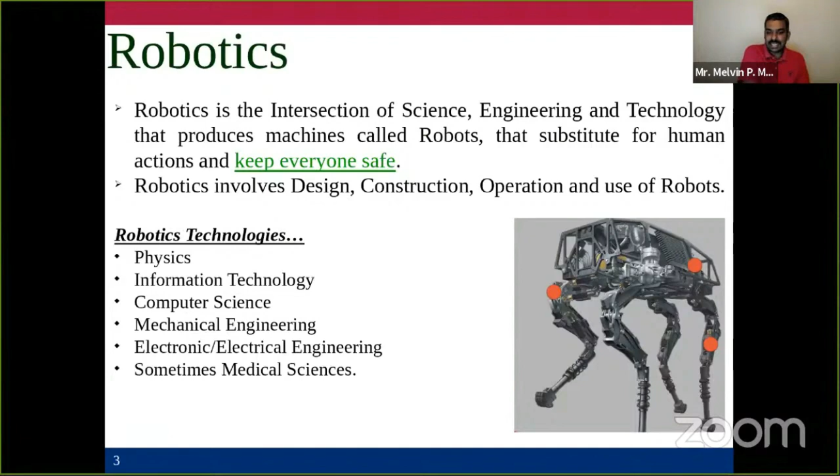Some of the technologies used for developing robots are physics, basically, because that's the main branch in robotics. Then IT, like for programming, computer science, mechanical engineering, electronics, electrical. Medical sciences are also involved in developing robots.

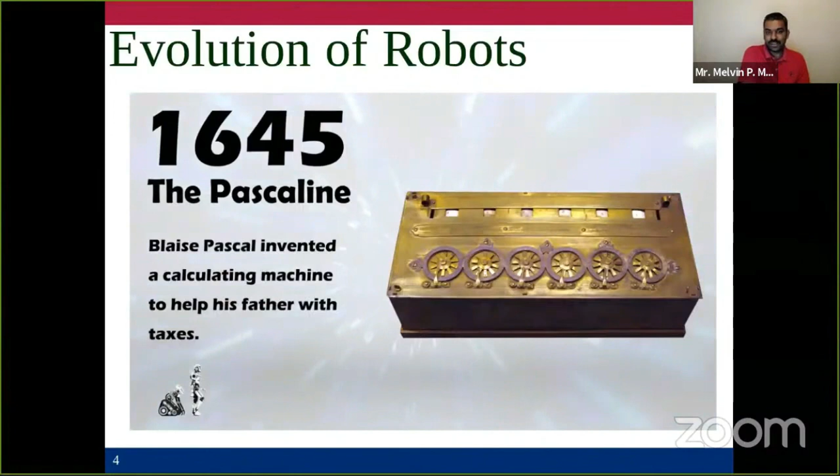This is a small video which shows the evolution of robots. As I told you, the name robot started only this century, but some automated mechanical things were there in the earlier 17th century.

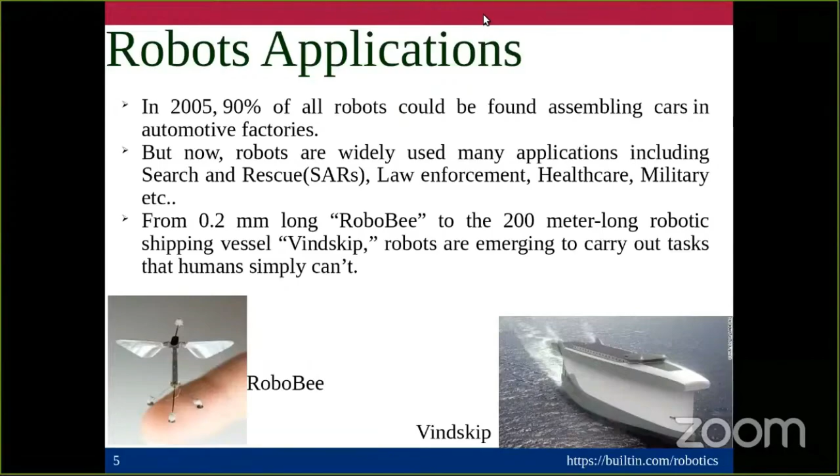I believe the video was clear. Just to save the bandwidth, I stopped my camera. It's basically the small robot of 0.2 millimeter long, called RoboBee, and the big one of 200 meters long, it's Vindskip.

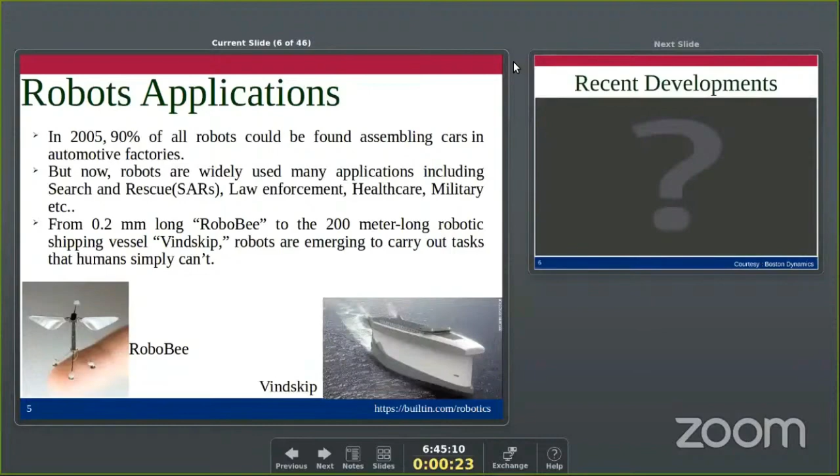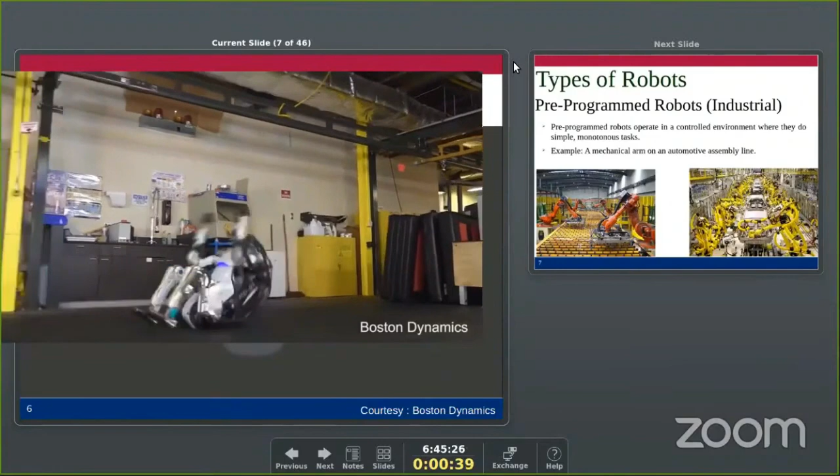The next video is going to show the recent developments of robotics. This video I took from Boston Dynamics, a company here in the US. They are manufacturing different types of robots, basically legged robots or humanoids. This is one of its kind.

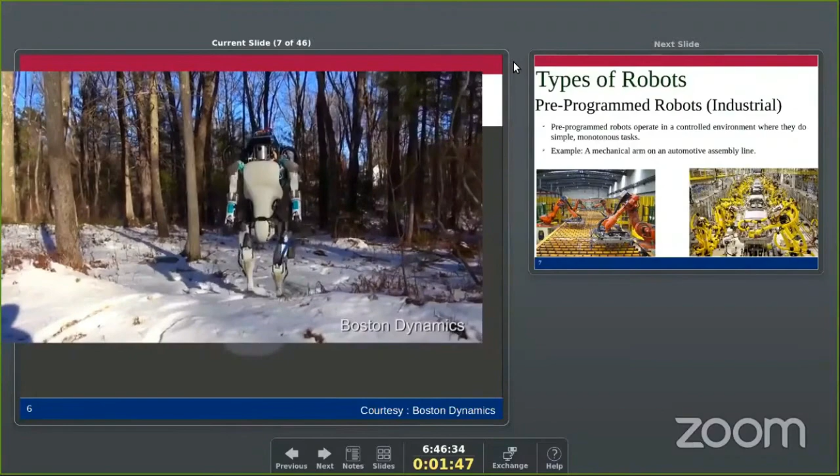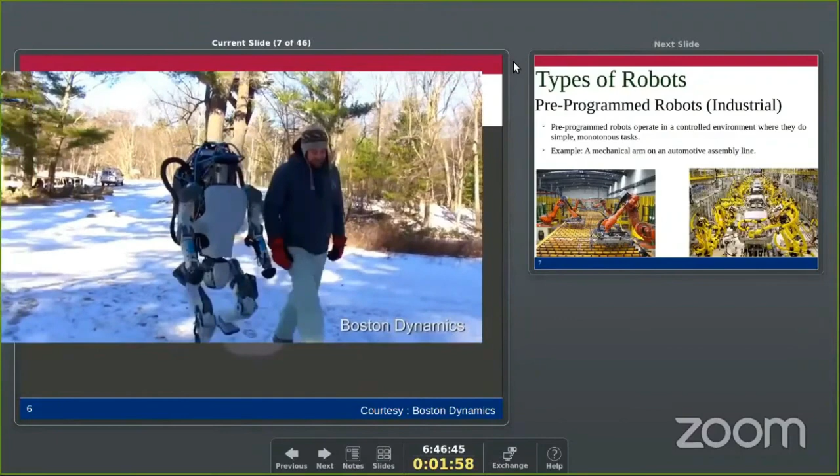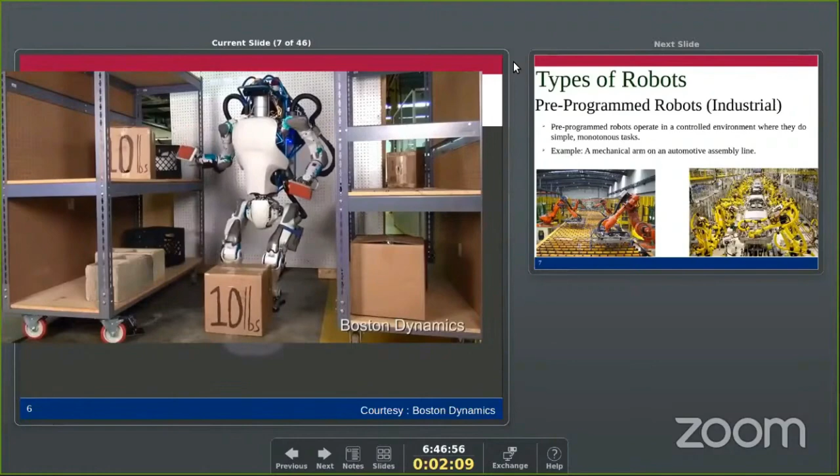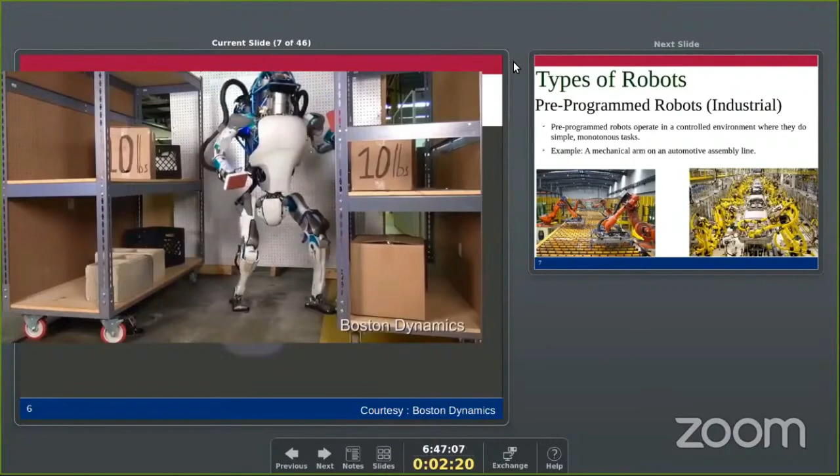You can imagine how complicated the dynamics will be, because it needs to stand on two legs like a human and control its movements. A lot of physics is involved here. This kind of robot is commercially available nowadays in the US.

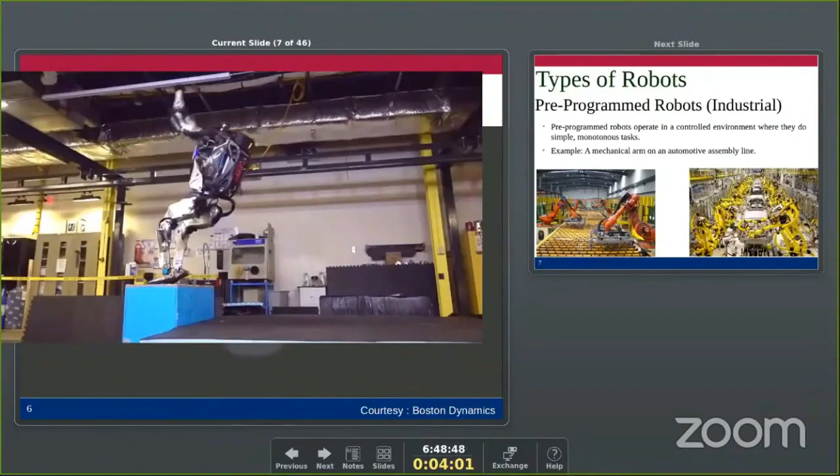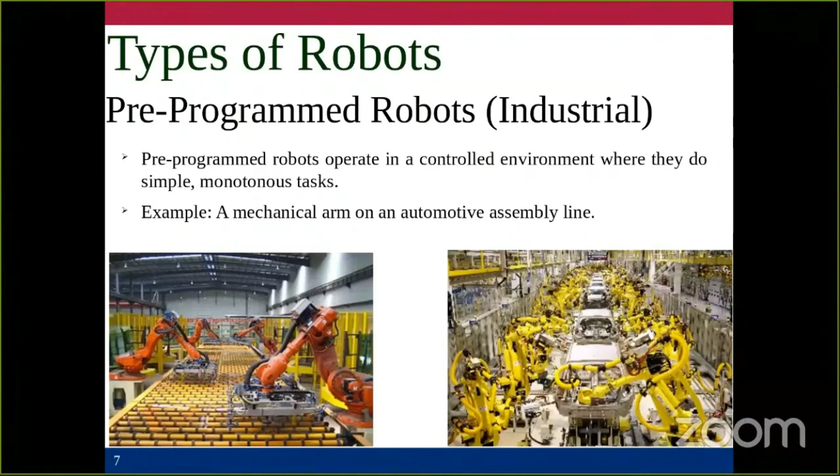Let me stop the video here because we don't have much time. Now we can see different types of robots available nowadays. The first one is pre-programmed robots, mostly used in industries for assembly lines. You can see some images here - it's purely a mechanical arm kind of thing for assembling cars, assembling different mechanical devices.

And humanoid - in the first welcome slide, I showed Sophia there, right? Sophia is the well-established humanoid robot.

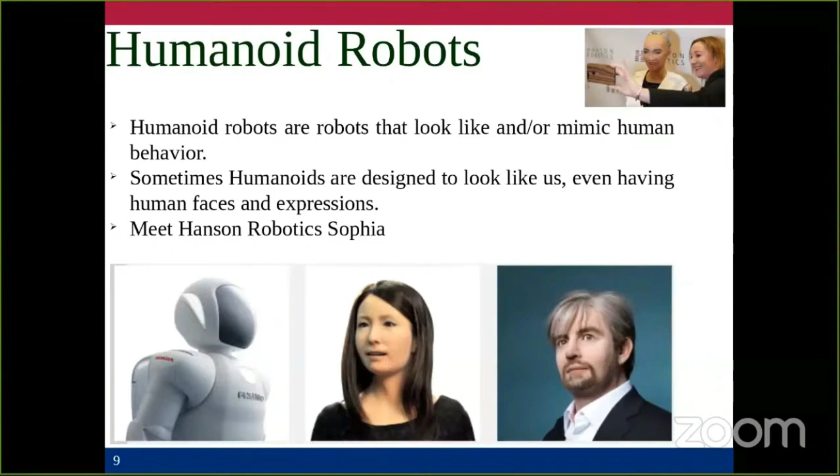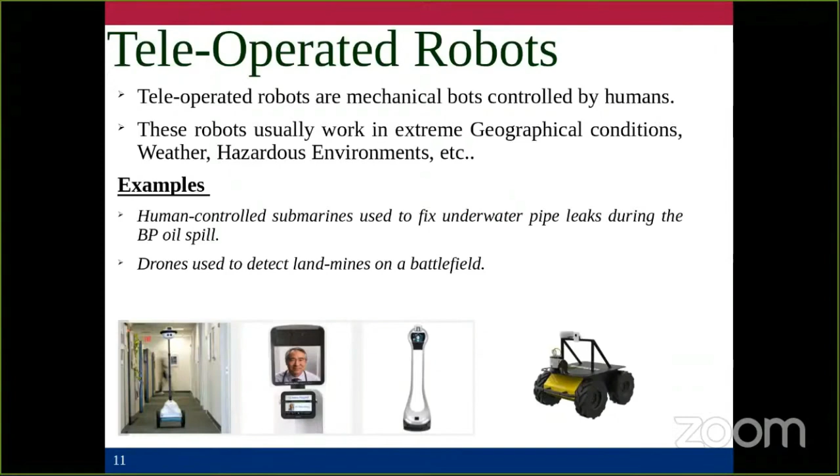Autonomous robots are different from teleoperated ones because we don't need a human being for supervision. The human does not need to carry a remote control, keyboard, or joystick to control the robot. Instead, the robot is intelligent enough to perform a specified task and manage by itself. That's the main advantage of autonomous robots.

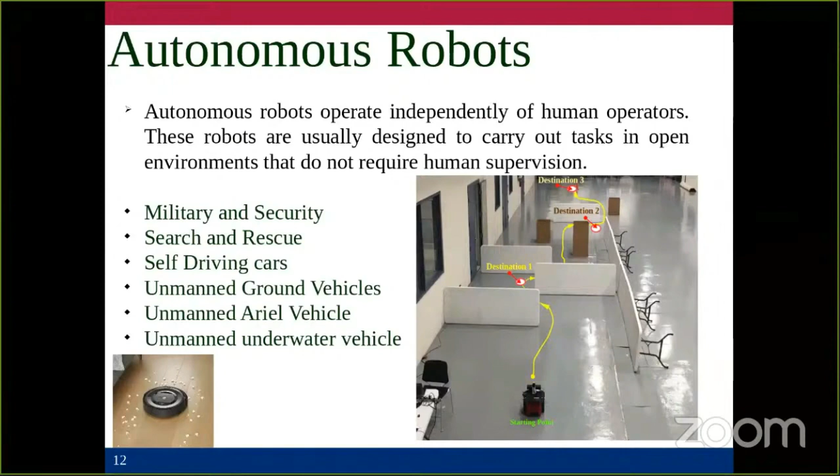Nowadays we use autonomous robots in military and security, search and rescue, self-driving cars, and unmanned ground vehicles. This one you're seeing is an unmanned ground vehicle. Then there's the unmanned aerial vehicle, drones are named as unmanned aerial vehicles, and the unmanned underwater vehicle, used for certain applications we need to do underwater.

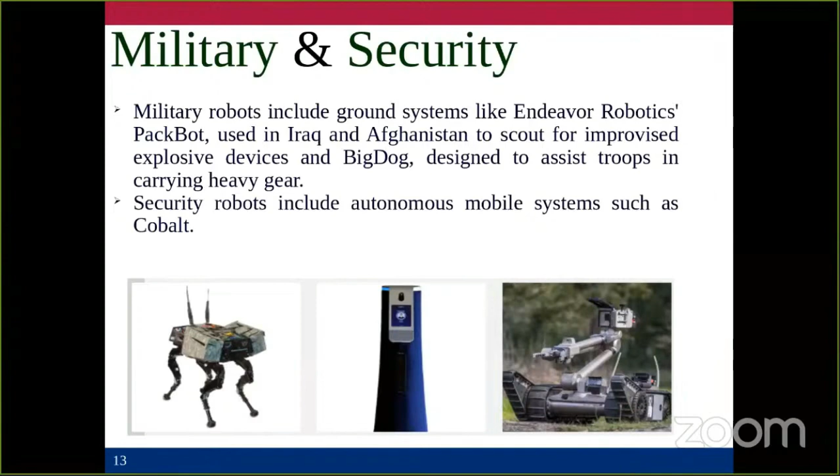I'm moving a bit fast because we don't have much time, that's what.

Finally, all the research work associated with autonomous mobile robots ends up in self-driving cars. The algorithms we develop for self-driving cars are not directly tested on a car; instead, they're tested on mobile robots first. I'll show you some of the mobile robots we use to test our self-driving car algorithms.

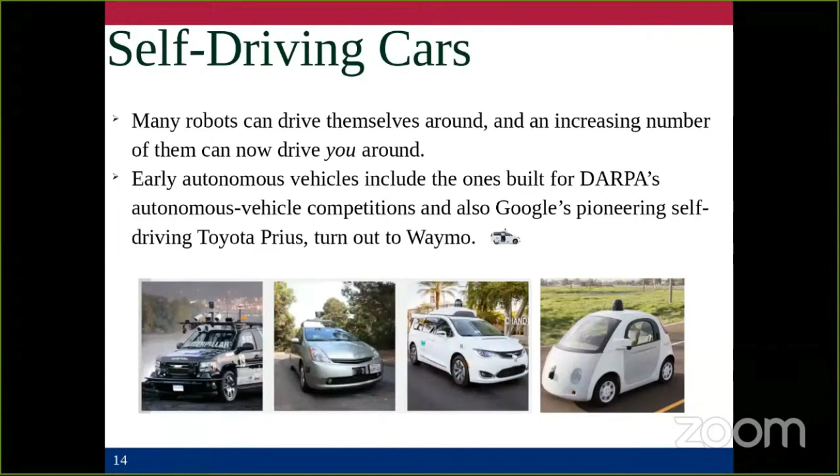Once the algorithm is ready after a lot of testing, the next step is to test it on a real car. You can see different self-driving cars here. The first one they tried was a Toyota Prius, and finally they shifted to different kinds of cars. On the right side of the slide, you can see the Google car. Waymo is a company developing algorithms for self-driving cars.

It's called an unmanned aerial vehicle, which is just a drone. A lot of applications of drones are available now. Even for wedding photo and video capturing, they use drones. I've also seen a lot of videos from the Kerala police tracking people going outside using their drones.

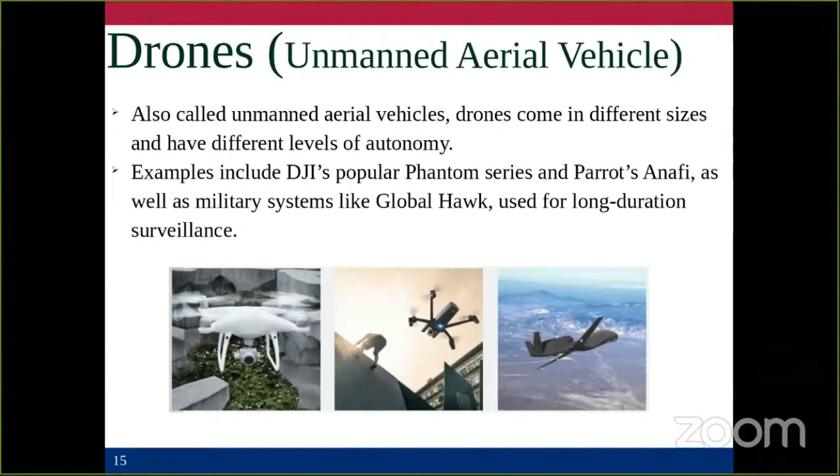In our case, we use drones for search and rescue operations. For example, in a natural disaster, if the military or rescue team cannot enter the disaster site, we'll use drones to go inside and see what is going on. In some cases, the drone can make a map of the environment, and by using the map, the rescue team can plan their task.

And this is the one that we are working on here, disaster response robot. I already told you about unmanned ground vehicles. Many countries already tried robots for disaster management. The first one of its kind was used in Japan during the earthquake and tsunami in 2011. And in the US, we all know the World Trade Center attack, 9/11. That time we used drones and robots to go inside for survivors. But it was not that well established at that time. This was the first time we used robots for rescue operation or disaster response.

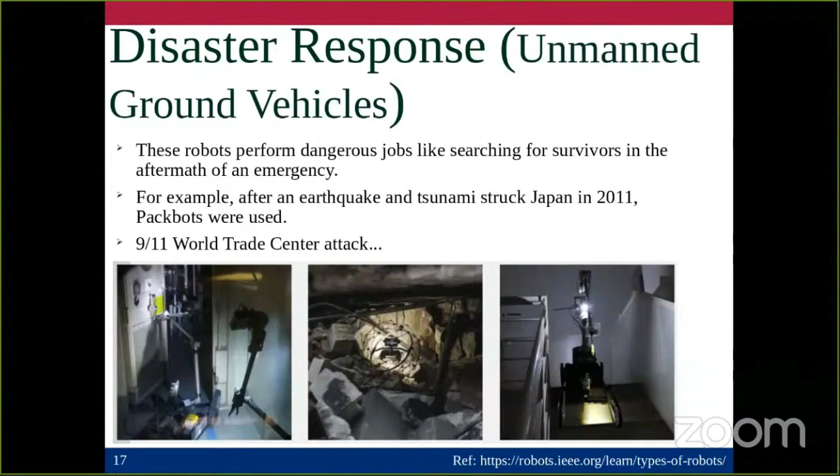So these are the different applications of robotics. Some of the types of robot we already covered, and you can see underwater, space, military, entertainment, security and surveillance, healthcare, and disaster management, delivery robots. I forgot to mention that Amazon recently developed a delivery robot. You can see on the right side down, that's a delivery robot. It is not commercially used yet, but it is still under development. And household robots in warehouses for shifting heavy loads.

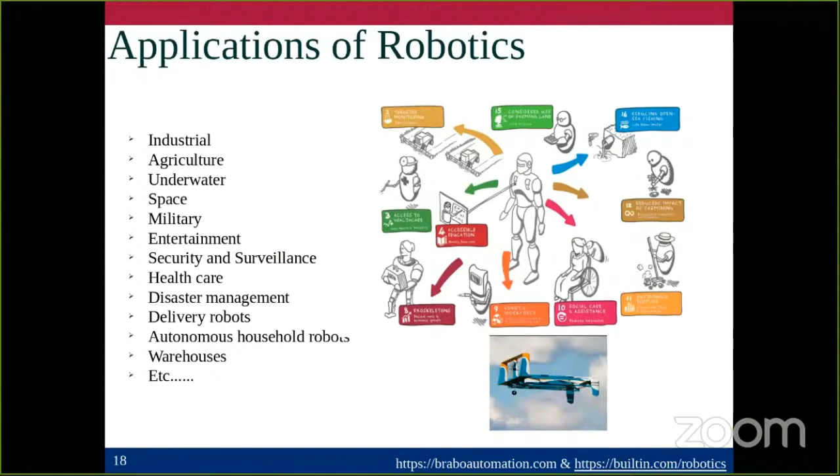We are using robots for this. So that's it about the basics of robotics.

I think now some of you may be in confusion. Okay, it's good, but how to proceed? Is it easy? Is it expensive? Who will teach me? How to test? Who will support me? And where are the resources, right?

So don't worry. Some of my personal inputs to you guys: make Google your best friend, okay? Because almost all resources, programs, code, design details, everything is open source. So if you know how to search for a specific resource, you will get it from Google. And the next one is ROS Wiki, because we are going to program the robots with ROS. So ROS Wiki and Google need to be your best friends. That's the first basic phase if you are interested in working with robots.

As I told you, a lot of open source resources are available. So you don't want to reinvent the wheel, okay? You just need to use those resources for developing your own resources or your own algorithms. That's it, you don't want to start from scratch. Utilize open source resources, many are available, and I'll try to give some of them for you to start with. And more importantly, take it as a hobby. Once you start working with robots, it's very interesting, and you can take it as a hobby.

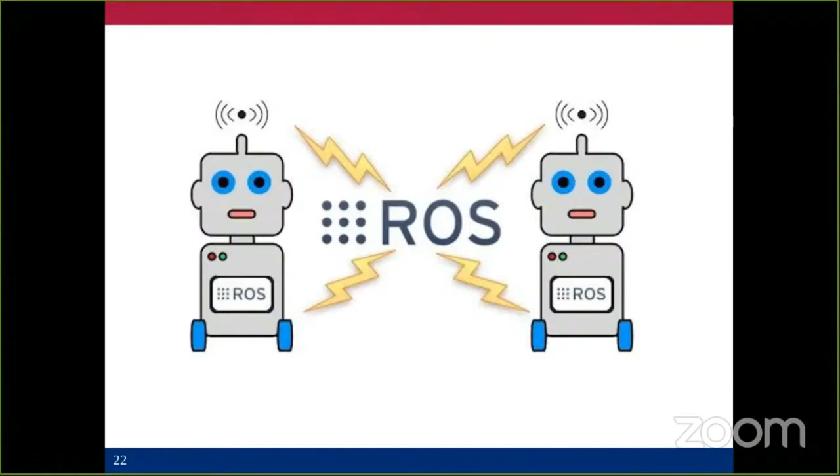Now we are going to start with a small introduction about ROS. As you know, ROS is Robot Operating System. Before starting with ROS, the first thing I need to introduce is the Ubuntu operating system, Linux operating system. Because even though the ROS team says they are ready or can use ROS in Windows or Mac operating system, it's actually not well established. If you try to install ROS in Windows or Mac, you will end up with a lot of issues.

But if you are using Ubuntu for installing ROS, this is the best place to start with. You will not meet any issues with ROS in Ubuntu. And the main advantages of Ubuntu are that it's user friendly, it is free, and it is secure.

If you are using Windows, you know a lot of viruses will be there, and we need to purchase antivirus to safeguard our computer. But in the case of Ubuntu, you don't need to worry about any antivirus threat, and it has high customization. As I told, there's a Ubuntu community with lot of free resource persons available if you have any issues with Ubuntu.

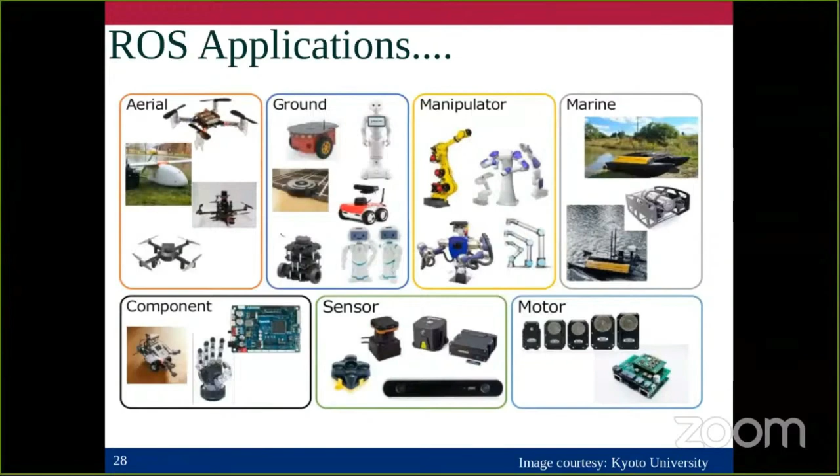Some of the features of ROS: it is BSD, Berkeley Software Distribution, like a license system. And as I told, a ROS system is composed of a number of independent nodes. Nodes means, as I mentioned in the previous slide, the sensor - the camera. The camera software or camera ROS package, you can consider it as a node. The package for the robot is another node, and the package for navigation is another node.

So these nodes are communicating with each other. Some of the nodes will be publishing some data, some of the other nodes will be subscribing to that data, and they are communicating with each other. Coordinating all these nodes results in the robot running - that's it.

Another important thing is some of you may be good in C++ programming, some of you may be good in Python, Lisp, Java, and almost all of you are familiar with MATLAB, right? So you may have some questions.

I'm not good in C++, but I'm good in MATLAB. So can I use a MATLAB program to develop some of the nodes by my own? Yes, that is the beauty of ROS.

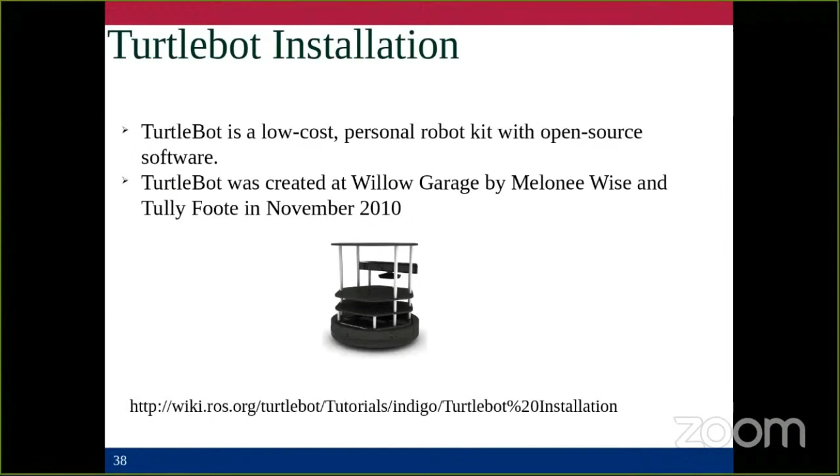And the link below is the installation package for Turtlebot. Once you install ROS, if you want to play with the Turtlebot, you can use that link. Same as with ROS, there are 5 or 6 different steps, copy paste in the terminal, and you are done with the installation. Then you can start playing with the Turtlebot.

Let me try to take Turtlebot on my machine. So open a terminal, and there should be a ROS core, because I am just enabling my master on my computer. And now I need to call Turtlebot, right?

So don't worry about all those things, these are just commands. ROS launch is a command, a command to launch the node that you have created.

So as I told, I'm going to launch a Turtlebot here. I already downloaded the freely downloadable node for Turtlebot on my machine, and now I am launching that node here. That's it, Turtlebot.

So don't worry about all those things, because once you are familiar with ROS, this will be easy for you. This is not that complicated, it's just the ABCD, the preschool level, of the ROS field. So I just launched the Turtlebot here.

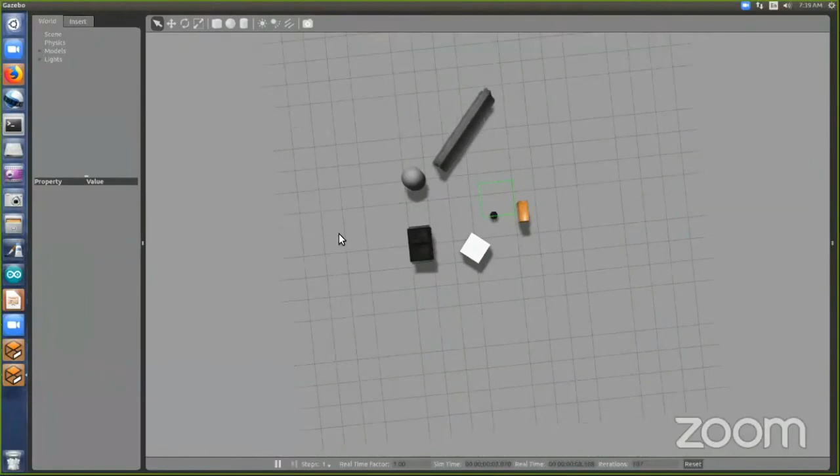And this is the Gazebo that I was talking about, this is a Gazebo simulator. I think you can see it now, right? And you can see this is the Turtlebot, with some sensors, a camera here on the Turtlebot.

And if you come here, you can insert a gas station, a building here. You can see, you can put a jersey barrier here. You can create your own environment for trying out your developed code. It's that easy, see, now the environment is ready, right?

You don't need to worry about your lab facilities, how can I keep an obstacle in between, how can I purchase a robot. Don't worry about all those things, you have your robot here ready to go, and you can create your own environment here.

Don't think that you can install only a Turtlebot. If you download the model of any commercially available robot, you can see it over here. I'll try to download and include a Pioneer robot here. See, this is a Pioneer robot, it's that easy, now you have a Pioneer robot here to start with.

And if you need a Pioneer 2DX, it is here, and this is the robot that we are using here, the Pioneer P3DX. So you just have to integrate different nodes to make your own algorithm or application. The application can be a delivery robot, an assistant robot in a hotel, a waiter, or an assistant for a nursing practitioner or a doctor. It's up to you, all the resources are freely available here, so integrate your idea with the available nodes and you are ready to go.

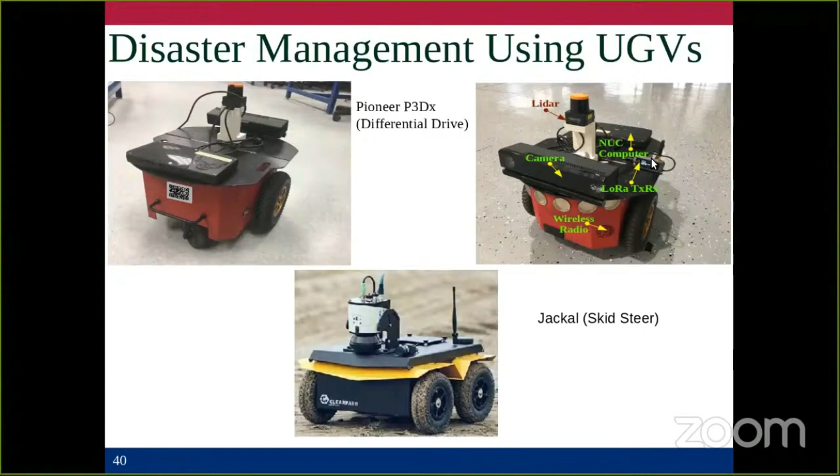In the Pioneer P3DX you can see different sensors: the LiDAR on top, for which there is a ROS package; a Kinect camera on the front side; the golden color parts are ultrasonic sensors; and you can see a radio module called LoRa, and a NUC computer. All these things have different nodes. We downloaded all the different nodes on the computer and integrated them to work as a single unit.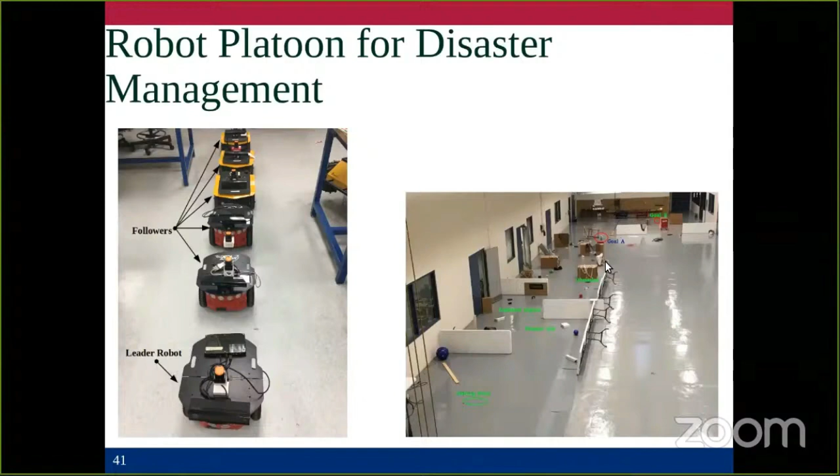Okay, so see the video. I think the video is clear for you.

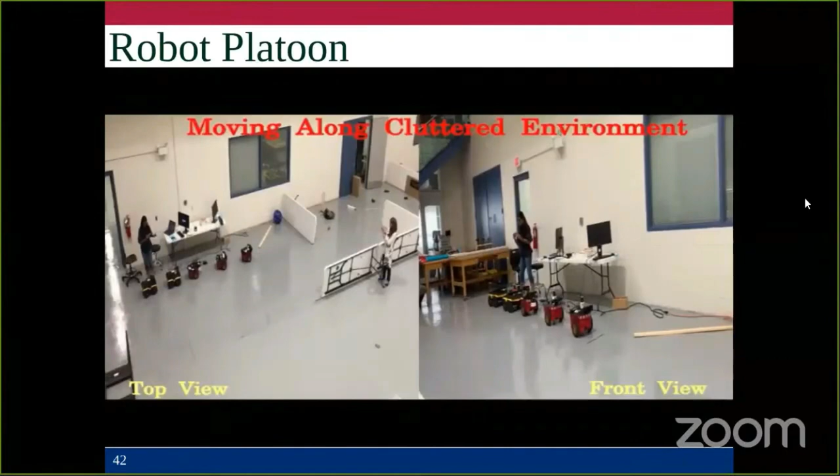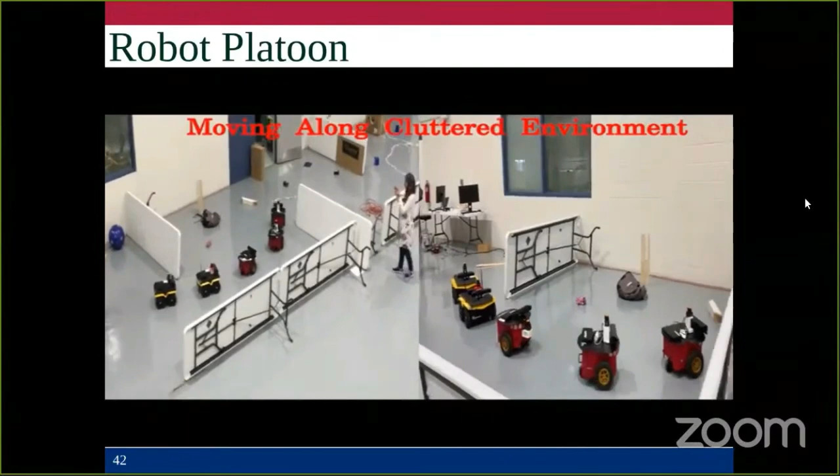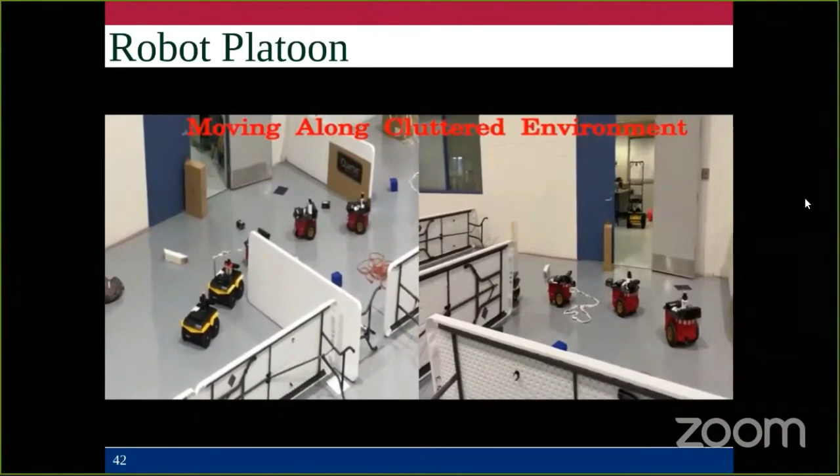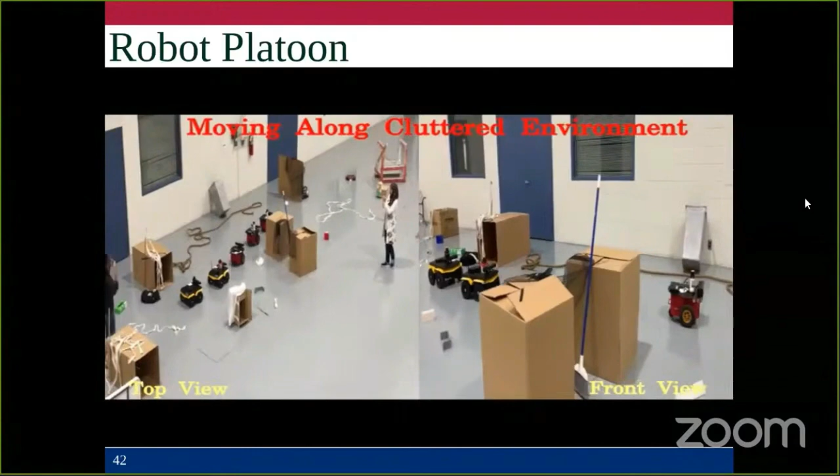You can see the front robot, the first robot, which is the leader, and all others will be following it. On each robot you can see a LiDAR, a Kinect camera, a computer, and ultrasonic sensors. All those things we are using for detecting and avoiding obstacles. The algorithm is a platooning algorithm. We took all the freely available resources, nodes for different sensors, integrated them, and developed our own algorithm in MATLAB for the platooning. So in the platoon, we have a MATLAB program, a C++ program, Python code, and Arduino code. It's the best integration of different programming languages.

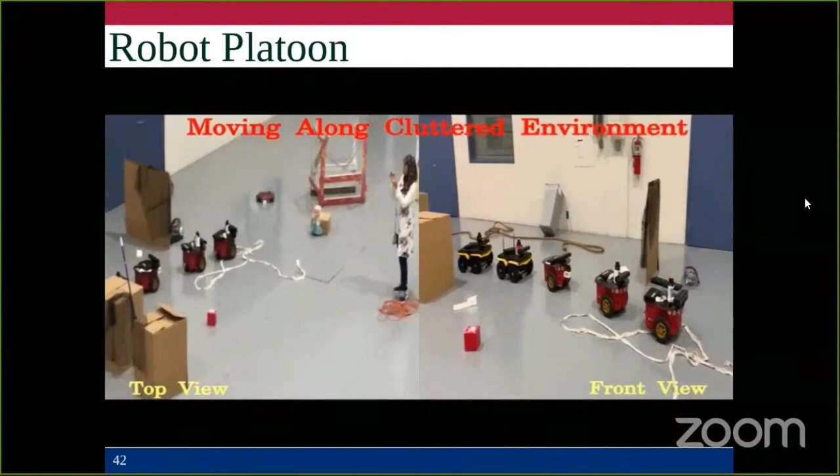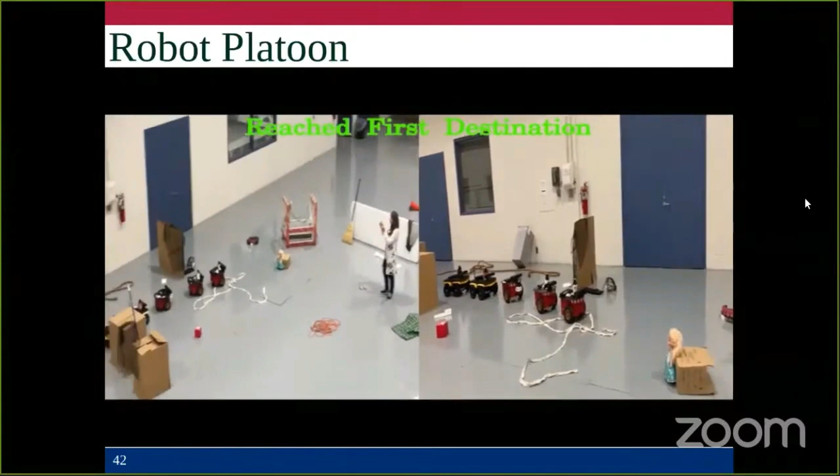See, the whole platoon reached the first destination. You can see a small doll there, not the lady who is shooting the video. That's a victim - consider the doll as a victim - and the whole platoon reached there.

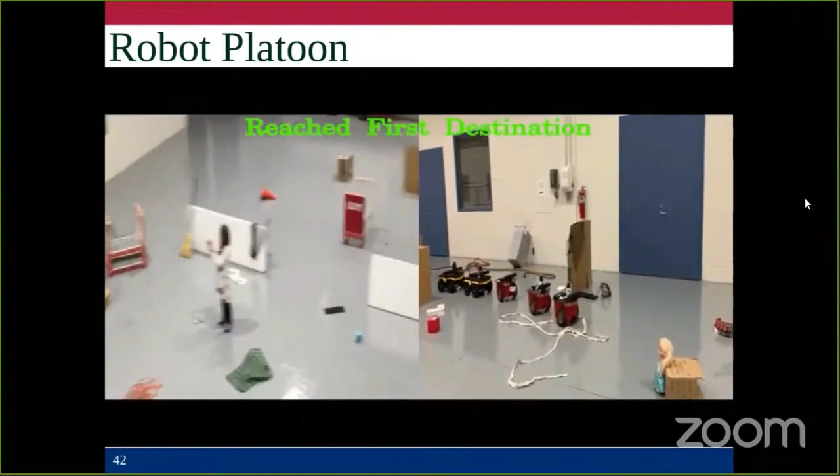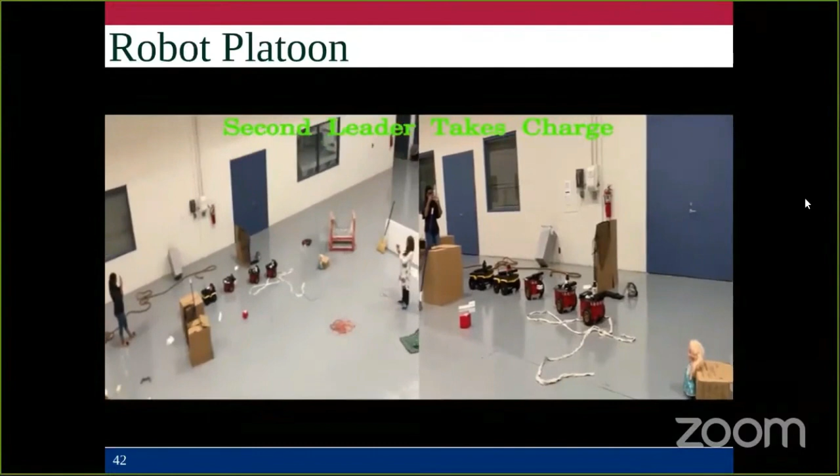Suppose we have some first aid kit available on the robot. The first two robots will stay back there, and the remaining robots need to go to the second victim's place. Everything is automated. You can see the third robot taking the lead, and it is going to the final destination, the second victim's place.

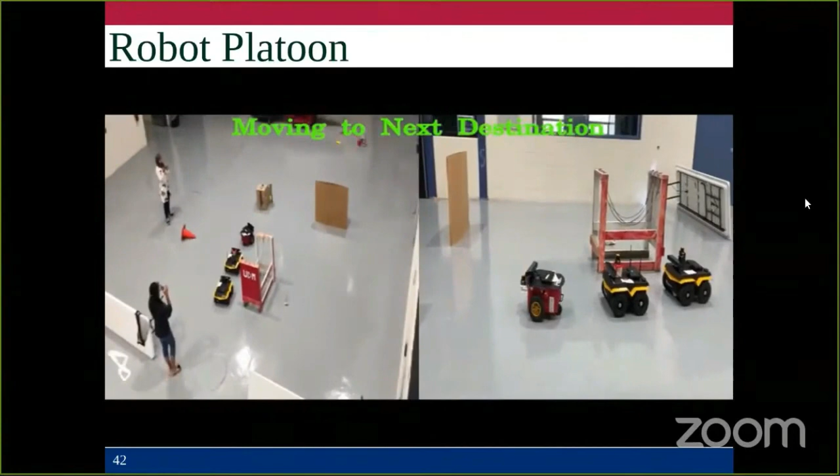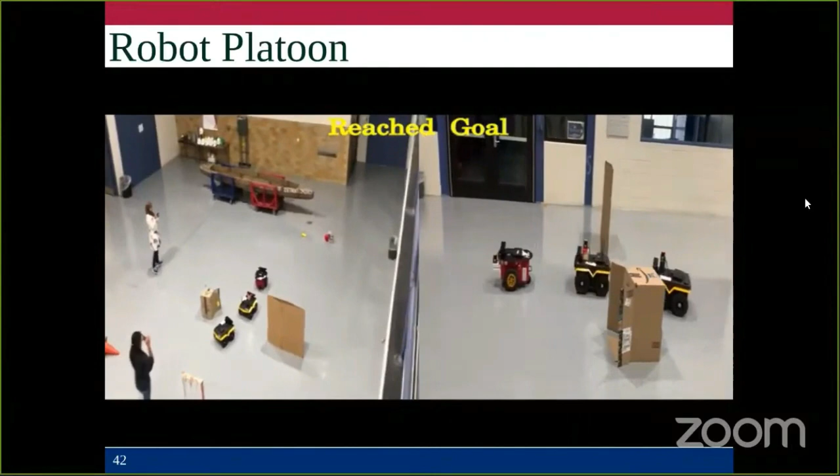There you can see another doll that we kept as the second victim.